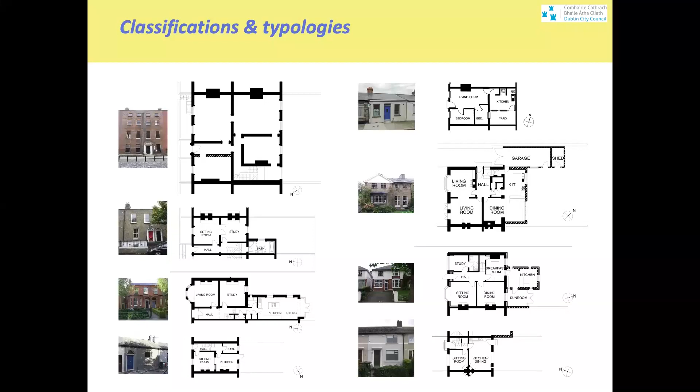So on the top left, we have a mansion house in Henrietta Street, and the bottom left is Irvine Terrace. And I suppose it's just curious that you could take the floor plan of Irvine Terrace and drop it into the front room of Henrietta Street. It's literally just drop it in. So in terms of, say, floor area, it's 4 times the area in terms of the ground floor area of those two houses.

But when you take that across the overall floor area, across the multiple levels and the volume, you have a difference by a factor of, say, 22 in floor area, and a difference in volume by a factor of 30. So they're two very, very different buildings, and those characteristics should inform some of the decisions that will be made. Take a simple example: the impact of a chimney as a cold bridge going through roof insulation is more dramatic in terms of the overall heat loss of a small building than a very large building. And then the top right there is capturing that information in graphic format.

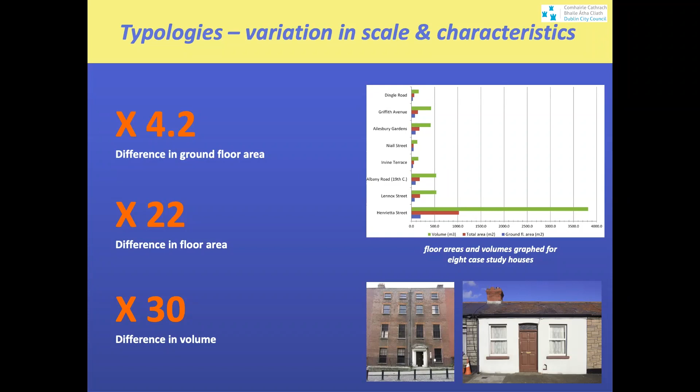So just to clarify, there's a range of 15 case studies. 8 of the case studies are buildings where a retrofit took place. In other words, at the time of the study, the works had been finished. We interviewed homeowners. We carried out a BER assessment of the building as it was retrofitted, and then we matched that with a BER assessment before it was retrofitted to get some statistics on the level of improvement.

So these were case studies where we're looking at the building, we're talking to the homeowner. If they have a couple of years of energy bills, we're comparing that to the BER data and looking at how the reality matches up to the calculated savings in terms of energy reduction. So these were the 8 where works had happened, and there was an interview process, and it's more a soft approach in terms of understanding how the homeowners felt about the impact. Did they feel it was an impact? Was it positive and all that kind of thing?

Whereas the other 7, we call them unretrofitted case studies. These ended up being more technical studies. So we took the buildings, and Joe and Building Life Consultancy and the team were organizing things like air pressure testing, in situ U-value measurements, hygrothermal assessment of different things. So these became much more scientific or analytical. There weren't retrofit works to these buildings, but they were used as, if you like, a model to study.

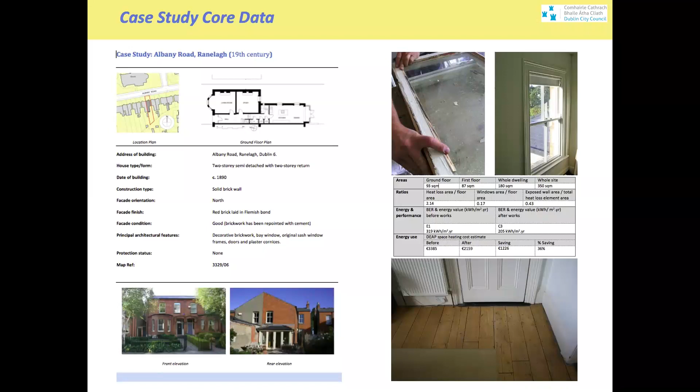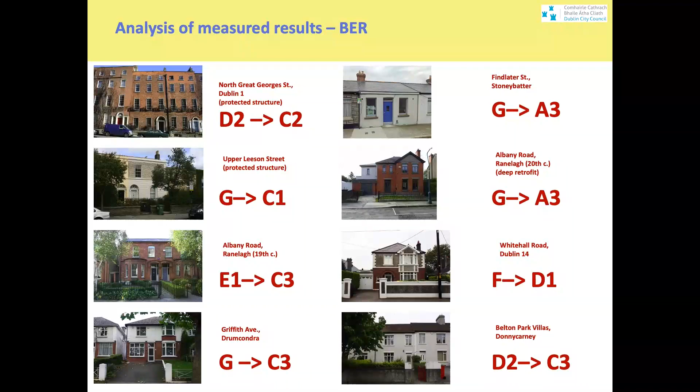So they were the BER results which came out for the retrofitted case studies. Again, we're looking at them when the job is finished, and there are some respectable results. The two top left Georgian buildings are achieving C1s and C2s with fairly benign interventions, moving up to the deeper retrofits, which were possible in the later housing. So I'm not going to delve into each case study and overwhelm people with too much information. We're just going to take one interesting fact from each one, and it might whet people's appetite to explore it a bit more.

So this is a Georgian house on North Great George's Street. It was interesting insofar as it was occupied in its entirety by a single family. Most of the buildings are partly occupied, or there's a mixture of commercial and maybe apartments on the ground floor and an office use. But this building is entirely occupied by a family, which was interesting in terms of mapping energy use and comparing it to the other houses.

What's interesting about it is it has the most efficient form factor of all the buildings. In other words, the four-story over basement Georgian building is enclosing the floor area more efficiently than any other of the typologies. So you'll see that this form factor is 1.03 in this building, and it rises up to say 2.5 or 3 in a detached two-story house. So that's a significant characteristic that contributes to the energy efficiency of the building.

And what happened in this case study was very, very benign. There was attic insulation, and there was an upgrade of the boiler and the heating controls. There was no wall insulation, no secondary glazing or anything like that. And the fact that it's achieving a C2, I think, is respectable. So again, we're looking at the characteristics of the building and how that relates to its BER.

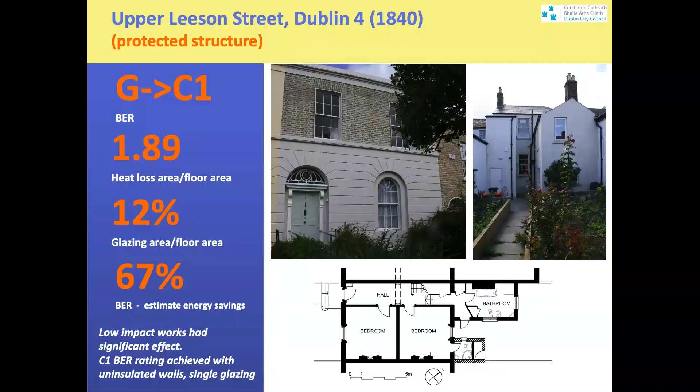And again, I suppose it's pointing to the idea of looking at the overall characteristics of the building, not jumping straight into a wall insulation approach because we feel we have to insulate walls. Often buildings like this perform adequately well for their significance in their period, as they are.

This is a Victorian house. There's two Albany Road case studies. One is this one, which is about 1890. It's a Victorian. There's a later one about 1930, which is an interwar house. Again, this house, there was a couple of things here.

There was a package of works done, mainly concentrated around the return, where we could apply Calsitherm inside the attic. I think underfloor heating was introduced to the solid floor of the return, and then there was works to the windows. But there was an attempt, I suppose, to do a package of work which would not create a lock-in effect.

So the works were concentrated in the return, and then the homeowner wanted to see how that improved comfort levels, and then possibly look at a later phase of works at the front of the building. So again, it's a progressive approach. It's a bit like the building passport idea, the energy upgrade passport idea, where you're not doing things which lock in, making a better improvement at a later stage.

There was an issue with the front suspended timber floor. There was a pre-existing issue with dry rot in the building. The front suspended floor was insulated with fiber insulation and a wood fiber board on the underside because the cavity was deep enough to get below the floor. Within a year and a bit later, there was a problem with fruiting cellar rot in the house.

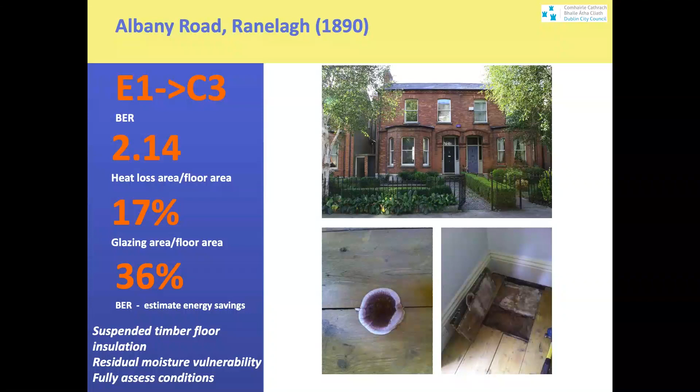So Griffith Avenue, you can't see the dates. I think this one was about 1930. Griffith Avenue was laid out about 1925, which I suppose makes sense. Again, a simple little retrofit project. What's interesting here is that the homeowners, I think there were two sisters living together, and they valued the facade.

Griffith Avenue is an attractive avenue, but they put a value on their facade and said, look, we want the house to be warmer, but we want to retain the facade without changing it. So there was a hybrid approach. There was external insulation to the side wall and the rear of the house, and the front received internal wall insulation with an overlap.

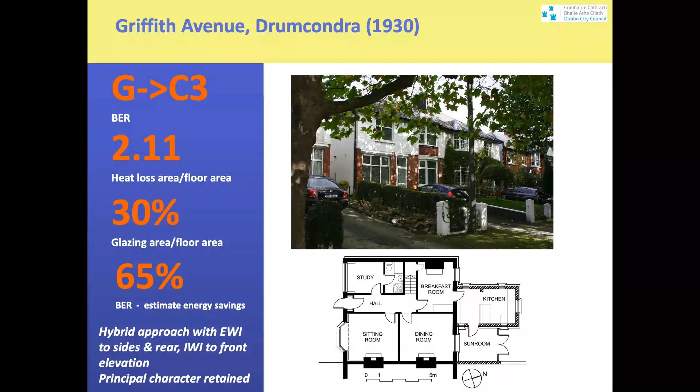So I think, again, we don't have to jump into a single approach. You can do hybrid things. You can do different things in different parts of the building that maybe keep the principal character. Again, you wouldn't do this to an older house, to a Georgian or whatever else, but for this period of house, we felt it was acceptable. The corner you're looking at there is externally insulated as it returns around the corner on the side gable wall. And I think the result is acceptable in terms of what it retains.

This was a deep retrofit of the other Albany Road house, which is 1935, I think. So it was one of the first EnerPHit retrofits. An EnerPHit retrofit is taking an existing building to near passive house standard. As I understand it, you can't get all the way there, but you get to a level that's pretty good, or close to the passive house standard. So the building was upgraded from a G to an A3.

It was extended to the rear. So the rear received an element of new build, which was externally insulated. And there was again a desire to retain the street side character, not to interfere with the appearance of the building at the front. So in this one, what I found interesting was the insulation approach. There was a variety of different insulation approaches used in response to different conditions.

So, for example, you could go with the full external insulation at the rear. At the front, there was internal insulation. At the stair wall, where the stairs is on an external wall, there's a thinner, I think, aerogel insulation used. So you can temper and vary your approach. It doesn't have to be the same to the whole building. You can modify it, and you can take something like this, which adds a lot to the street. It's very much part of the character of the area. But behind that, there's a full EnerPHit upgrade.

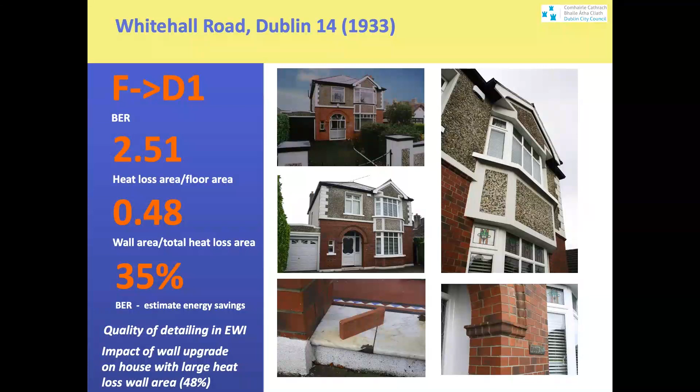Again, looking at the wall area to the factors here, we're up at 2.5 for the form factor, and half the heat loss area is the walls. So there's a strong argument for addressing walls in a house like this, which is detached, whereas that changes maybe in the terrace houses we looked at.

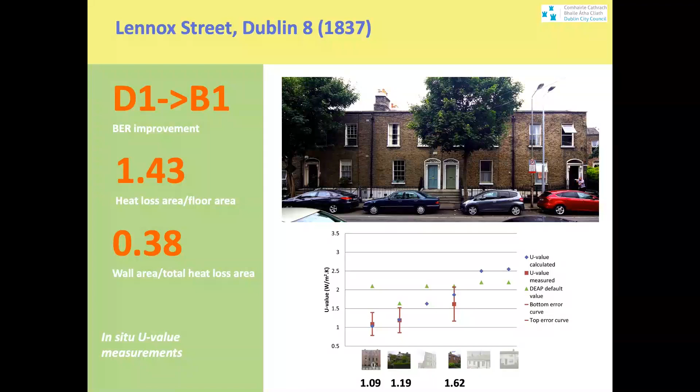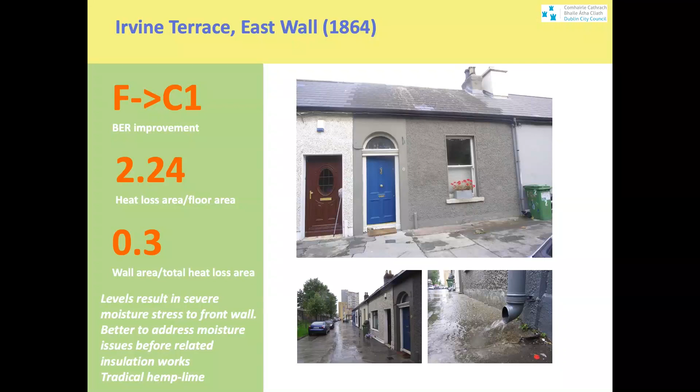I think there was a Tradical hemp lime proposed, which would be very hygroscopic, I presume, and would help to alleviate the particular conditions of the wall. So again, looking at your conditions and the type of materials and solution you want to use. This is Brighton Road, a Victorian house in Rathgar. Again, it's the two-storey over elevated basement type.

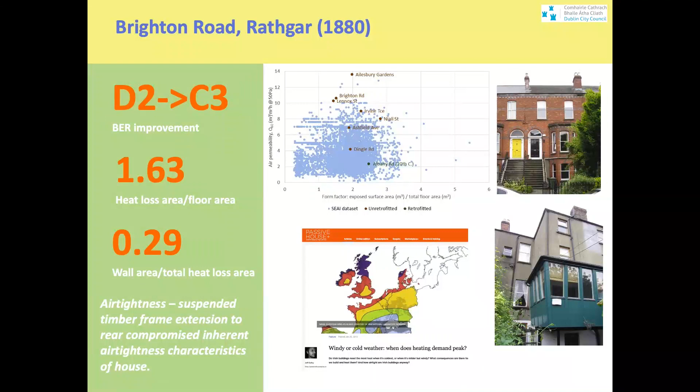And there was actually greater heat loss in the houses that they studied during the windy weather, not during the cold weather. So it's telling you that we're suffering from more heat loss by air infiltration than by heat loss through walls and roofs and so on. So again, air tightness is critical to the whole equation. And again, it's the whole thing about not jumping straight to wall insulation, that there are other things that are more important or maybe should be prioritized.

Findlater, so this is Joe Little's project. I'm not going to go into the technical side of it because he'll completely blow me away later, so I won't even try that. So again, it was a deep retrofit. What I find interesting is, it's not a protected structure, but it is in the Z2 zoning within Dublin, which seeks to protect the character of areas. There were little things that I know he considered at the beginning. I think some of the homeowners in the street might have lowered the floor level and squeezed an extra floor in under the roof.

But Joe was very strong at the beginning that he wanted to keep the original volume of the front room, the high ceiling height, and the original plan form, which is drawn from the Architectural Archive, the original Dublin artisan dwelling plan form. So as far as I understand, the original plan form of the front of the building was retained and it was extended to the rear. So plan form is important, even if you're doing a deep retrofit, keeping a sense of the spaces within the original house, and even a small little detail like the roof.

The roof was reslated, but the original clay ridge tiles were retained and mortared in. And it can be a battle getting roofers to. Most roofers want to use dry fix systems these days because they're just faster and easier, and it can be an argument to get guys to mortar on tiles, especially in cold weather. So the fact that these little details were retained, it all adds to the sense of character of the original building.

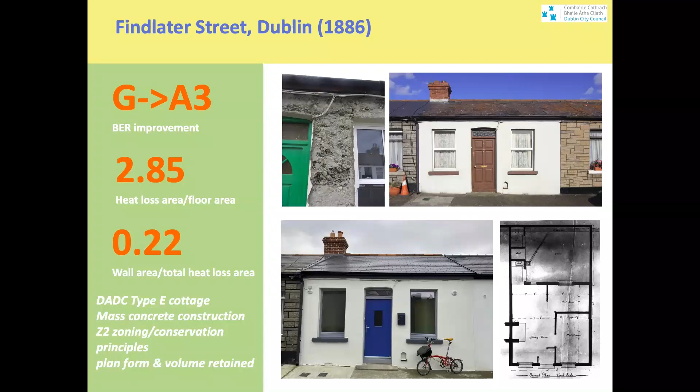Ashfield Avenue, Ranelagh, it's a 1900 late Victorian. Again, this is, if I get this right now, a hygrothermal assessment of the junction between the external wall and the floor, which Building Life Consultancy and Joe did at the time. So in simple terms, what we're looking at is the building has been cement pointed, and this is a Karsten tube, and they're measuring the rate of absorption of that brick, of that facade.

So some walls will absorb a lot of moisture. Some bricks will absorb more moisture than others. That's a factor in your insulation approach. The more absorbent the wall is, the more moisture it will take up, the more hygroscopic your insulation approach should be to allow the drying of the wall on the inside face of the wall.

So actually, I'll start with this column here. This is a modeling of the wall as it would have been originally constructed. So it would have had lime mortar pointing and so on. That's current, is it? Oh, sorry, beg your pardon. So the left is the original condition. So when it was built, we're looking at lime mortar joints. The wall has a higher degree of breathability than it has in its current condition, because we have cement mortar joints and possibly impervious linings on the inside of the wall.

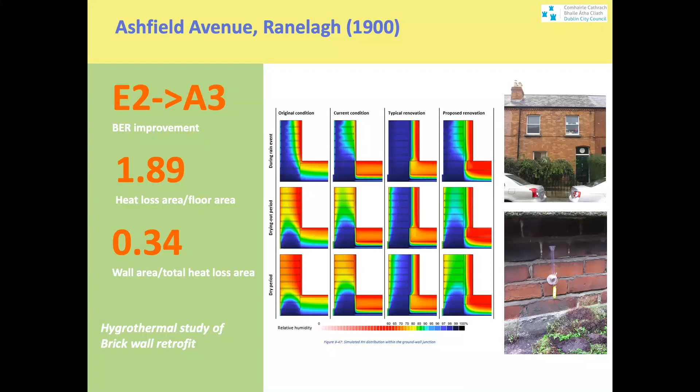If you do it with hygroscopic materials and materials that will let the wall breathe externally, so I presume here you're reinstating your lime joints, you're using a hygrothermal insulation, you have a limecrete slab, you can see that the moisture levels in the wall are reducing back to its original construction. So again, it's a little detail, but it's something that's important to all the house typologies: the importance of the materials that you use and how they relate to moisture management within the walls.

This little one, Ailesbury Gardens, what I find interesting about this one is there's an elderly couple who live here, and they've been there since, I think, 1971. The house has the original steel framed windows, and they love the steel framed windows. They don't want to let them go. So much so that when they built a small extension at the rear, they salvaged two of the windows that were broken out, and they used this material to repair and weld in sections to the windows. So they've made an enormous effort over their lifetime to retain the windows. They appreciate the character of them, and that they're very much part of the house.

But the windows are a problem. There was air tightness testing done, and there was thermal imaging, and also, I think, an anemometer that could measure the rate of air coming through between the frames. So it's obvious that the windows are a big problem. Some of the solutions looked at were secondary glazing, so not interfering with the glass and so on.

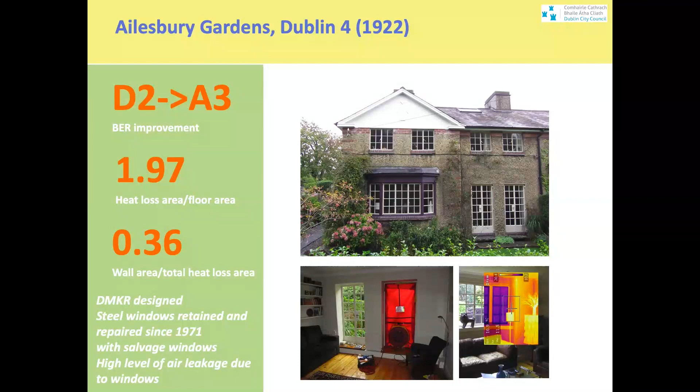But I suppose it's an example of just the care that some people appreciate. I mean, this house is 20th century, but I believe in most of the other houses in the terrace, the steel windows are gone. So this makes this more rare, more important. There's just a sense that the people value what they have, and regardless of what they feel they should do, they want to retain them. And I think that's valuable in terms of homeowners' feedback and how people look at their homes.

For Dingle Road in Cabra, again, Cabra houses, they're very simple little buildings. They're plain rendered front with, you know, simple plaster band and the concrete cantilever canopy. But I suppose what's significant about Cabra is just the sense of placemaking and urban design, that when you look at, for example, the radial layout here in relation to the church, which at the time was the center of the entire community, there's a very clear aim here to create something that's distinct.

And you get this in Marino as well, where the radial planform and the greens and everything else, small little simple building units can make something important. So it might seem very modest, or not of value in maybe a lot of people's minds, but overall, in terms of an entity, these estates are significant. And for example, the external insulation approaches that we talked about can have an impact, and it is having an impact on a lot of the estates in Dublin.

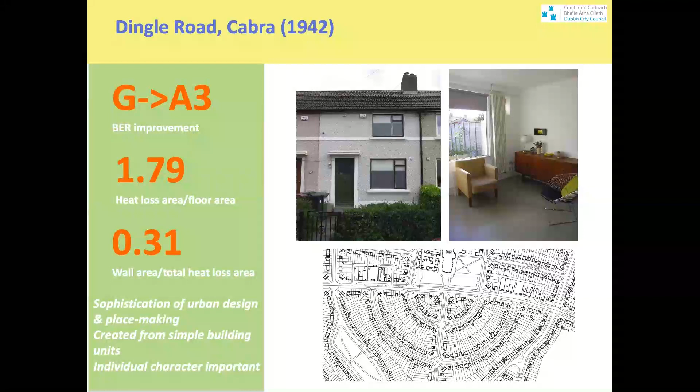Anecdotally, in Marino, I know an architect doing some work there, and I think DCC are refusing external insulation on some of the applications where it's called up, and then they're appealing it, and Bord Pleanála are granting it. So there's obviously a bit of a conflict in terms of planning policy, but I think we should think maybe carefully about it.

This was a study which formed part of Built to Last, just a concept or an idea. It might be aspirational in terms of trying to round up an entire terrace to work together, but the idea was that if we have to externally insulate these buildings, could you do it in groups and blocks where you have more control of the features, more control of the details, and you can come up with a coherent entity as the end product, as opposed to individual piecemeal upgrades. So again, Joe and the team, they look very carefully at all this.

So about the details, for example, again, all these house types are different. These houses have in situ cast concrete eaves, which is a problem in terms of thermal continuity, where you have external insulation and you're trying to join it up with roof insulation. So again, they look very carefully at this difficult detail of the bell cast slope of the roof. And I think this received an aerogel overlay over the concrete eaves.

So again, looking at the difficult details, looking at, for example, the cold bridging effect of the canopies. I mean, they're just simple little concrete canopies, but I think they shouldn't be lost. And there was an approach here: could you insulate it with an aerogel blanket and keep the thinness of it, but mitigate the cold bridge.

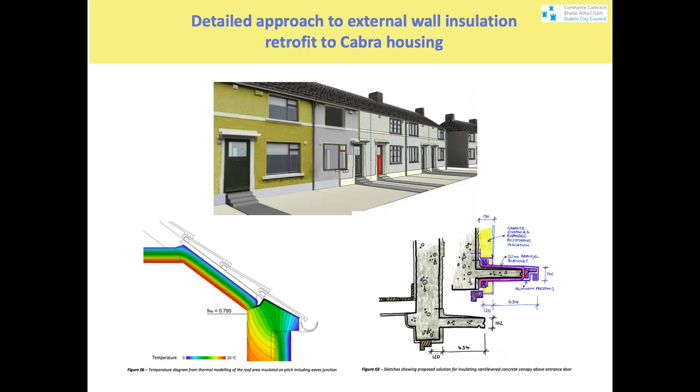So we're in a housing crisis at the moment, and sometimes in a crisis situation, bad decisions can be made. And I get a sense there's a retrofit wave about to happen. On the news this morning, I think 150 million from the COVID fund is going to be put into renovations, and it's all positive that we're trying to renovate derelict buildings and everything, but there's a feeling that between the grants and everything else, there's going to be a lot of work done in the next couple of years.

And I think careful attention to detail in terms of the thermal upgrade, but also in terms of the significance of the building, what you have, even if it's very simple features, it's important to look at that carefully and to find the balance.